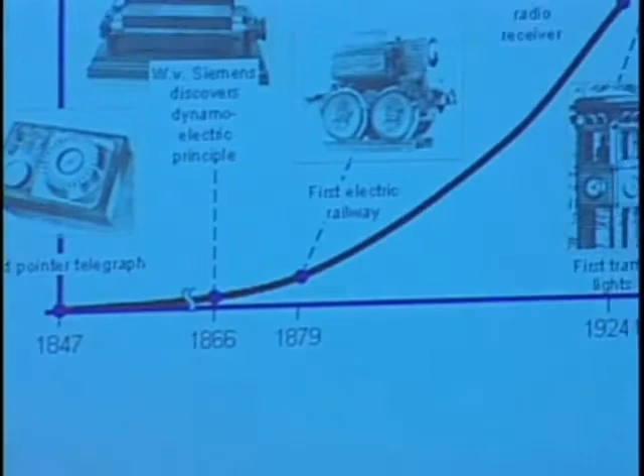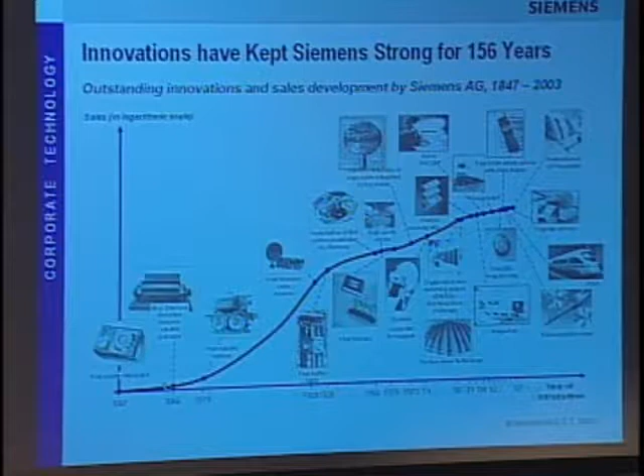Siemens has always been committed to innovation from its beginning. The company was founded 156 years ago, with its first product being the pointer telegraph. Today we would say this was a typical one of those garage companies, a typical startup. But at this time there was no venture capital available, and there were no cars and no garages. Nevertheless, the company started this product very successfully, and in the upcoming years it grew always through innovations.

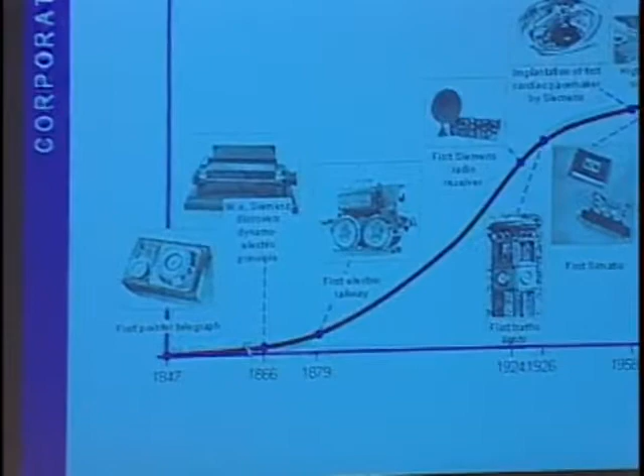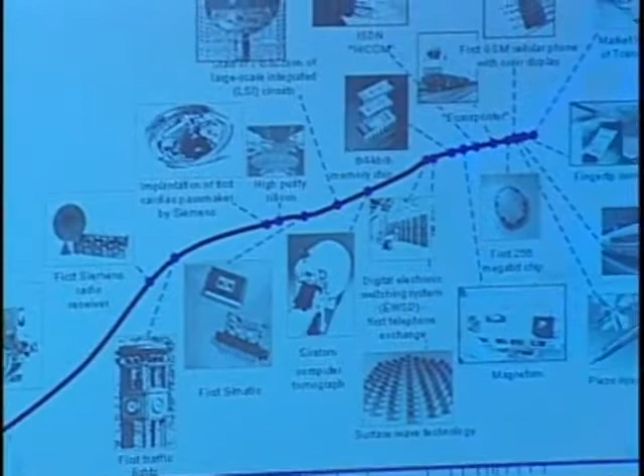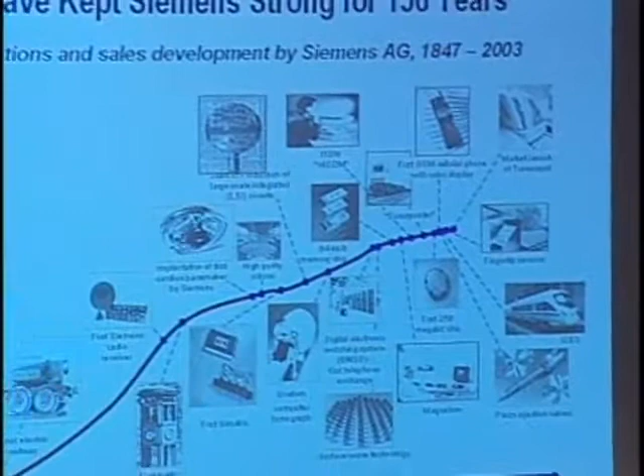Many of these innovations have become milestones in the history of electrical engineering and electronics, like the first electric railway, the first dynamo. In former times, there's also the high purity silicon developed in '53, and today still 80% of semiconductor grade silicon is produced using Siemens processes, though the patents have already expired. In recent years, just to mention the Piezo injector for diesel injection, or fingertip sensors, among other examples.

Today we are number 3 in the world of electrical engineering and electronics, following General Electric and IBM, with total sales of 74.2 billion euros in 2003. By the way, 25 years ago we were number 7. What should be mentioned in this ranking of the top 10 electrical engineering and electronics companies is that Siemens is the only European company. And there, for the first time, we have Samsung, a Korean company, getting into this top 10 list.

So what's unique with Siemens, on the one hand, is that we are mainly engaged in the field of electrical capital goods. But another special thing about Siemens is its high degree of internationality. We have presence in more than 190 countries, and it's said that only few organizations are more international than us, for instance Coca-Cola or the International Federation of Association Football. But the internationality of Siemens is a result of its long history, and it's indeed one of the big assets of our company.

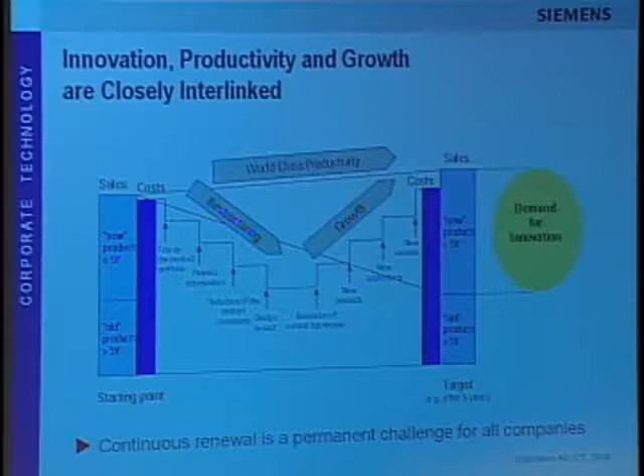The third statement I'd like to make is, and this is an empirical experience, that the deeper the V, apparently these are the innovation champions. So those companies which learn how to restructure very effectively create apparently a type of culture, a type of atmosphere which is very fertile, very useful for innovation.

Segmenting the sales position into so-called old products, which are older than 5 years, and new products, younger than 5 years. After a 5 year period, all the old products have disappeared, and the new products have become old products.

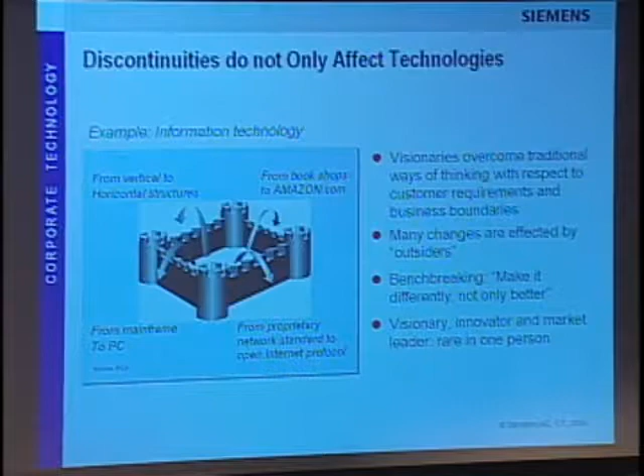The typical example is in the field of information technology, when we went from proprietary network standards to the open internet protocol, for instance, or from mainframe computers to personal computers. It resulted in a change in the industry from vertical to horizontal structure, or completely new business models like Amazon.com.

And apparently, the background of this type of change is that those visionaries overcame the traditional ways of thinking with respect to customer requirements and business boundaries. That means they left this castle of thinking and jumped outside to look at it from the outside. And apparently many of those changes were effected by outsiders.

In connection with this, there's also the word bench-breaking, on top of or in addition to benchmarking, which is no doubt a very useful tool and a must. But sometimes bench-breaking, meaning making it differently and not just better, can be the better strategy.

Another experience is that the visionary, the innovator, and the market leader being the same person is rare. This was the case with Thomas Alva Edison and maybe Werner von Siemens, but in more recent times I did not find many examples of that.

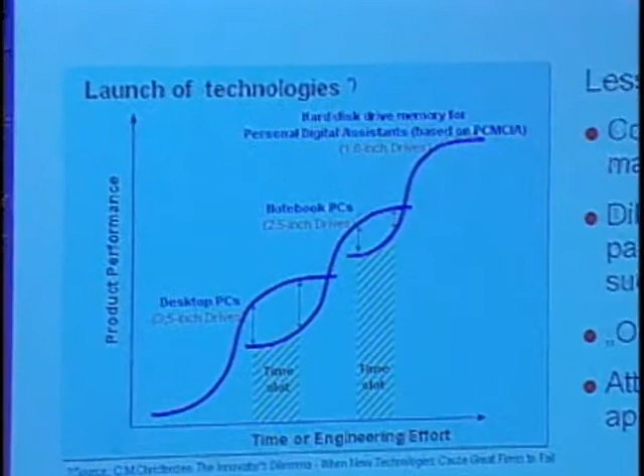In this context, there's the famous book by Christensen on the innovator's dilemma, describing the fact that the launch strategy and launch time are decisive for the success of a new technology. He described this with the hard disk drives, where one generation was substituted by the new one, differing in the diameter of the disk itself, along with many other things.

The main lessons learned were that it's maybe not most important to be the fastest on the market, but it's decisive to make the correct anticipation of the product, of the customer, and of the market requirements. That is decisive.

In connection with this process, big companies mainly face a large danger or dilemma: the cannibalization of their own successful businesses. And all we can say is, if you do not cannibalize your own business, then others will do it for you.

Another experience is that old technologies fight back, and the lesson learned is: if you have a new technology, you should attack via a new application, not start a direct attack on the established technology. There are a lot of good examples in history.

The most prominent, no doubt, is the cathode ray tube versus liquid crystal displays. Liquid crystal displays have now reached a point where they can compete with cathode ray tubes in size and performance. But they did not start a direct attack on cathode ray tubes in the 70s — instead starting with wristwatches, pocket calculators, pocket TVs, and similar things.

I'd like to say also that due to the pressure of liquid crystal technology, the producers of cathode ray tubes significantly improved their products and their performance.

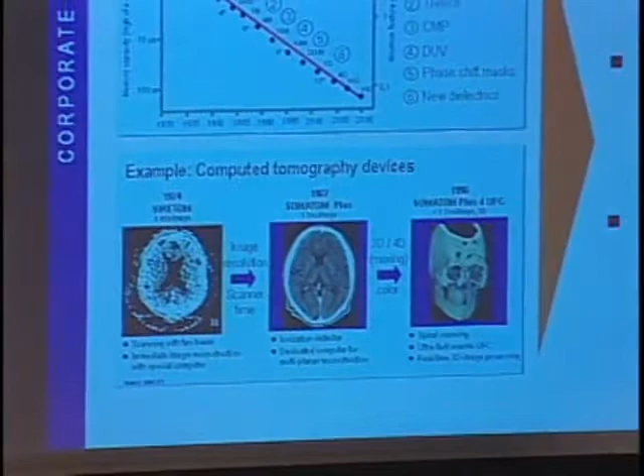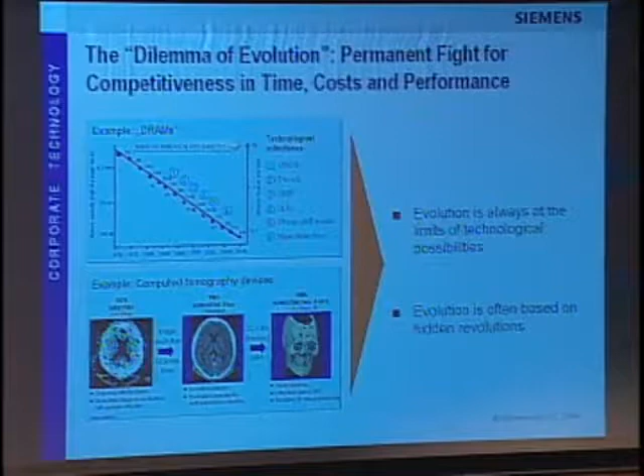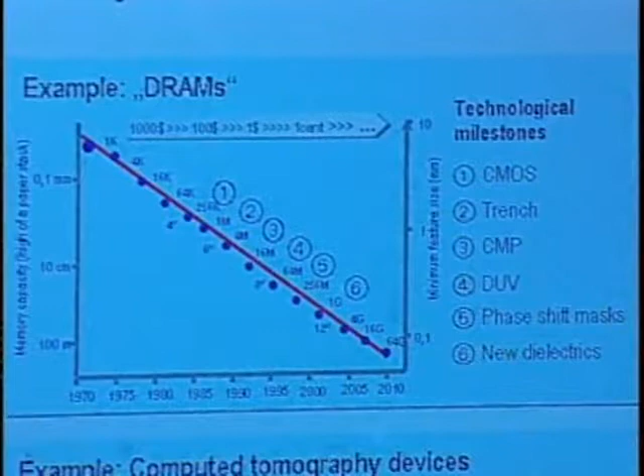Looking at two typical evolutionary developments in more detail: the first example is the DRAM, and everybody's aware of Moore's law. But looking in detail, with the 256K or the 1 megabit, at the latest, we switched over from NMOS to CMOS technology. With the 4 megabit DRAM, we had the trench technology.

With the 16 or 64 megabit, chemomechanical polishing came up. Then deep UV lithography or phase shift masks, and now, beyond the 1 gigabit, we have to look for new dielectrics.

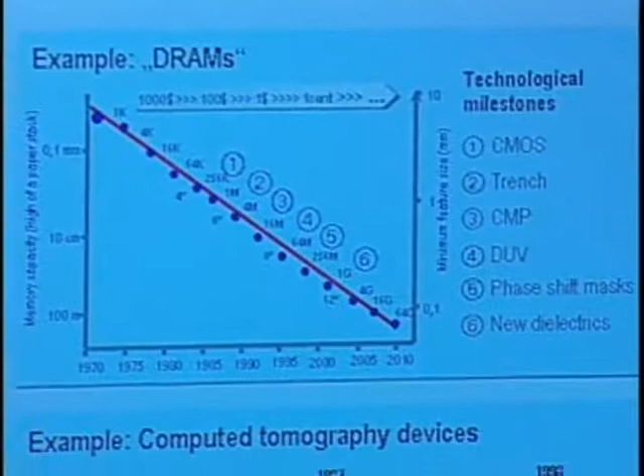The other example is computed tomography devices. This was one of the very first ones, in '74. You can see how the quality has improved through many, many improvements — based on the algorithmic side, the detector side, and many other things.

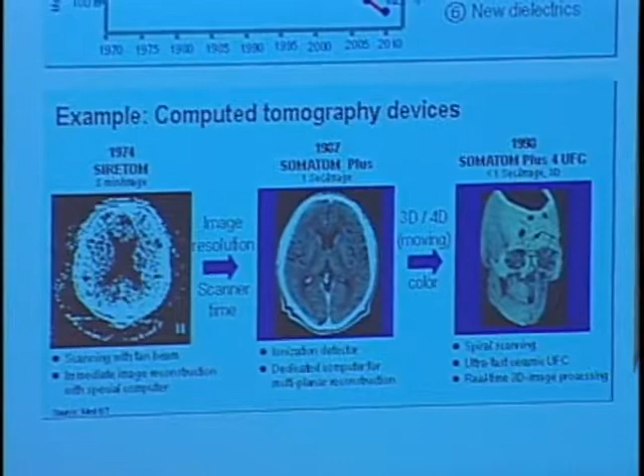So what we can learn from this is, first of all, evolution is always at the limits of technological possibilities, which makes it difficult. And the second statement is: evolution might look like evolution from the outside, but if you look deeper, you'll find a lot of hidden revolutions, because each of these steps by itself represents a revolution within that technology.

So what we can learn from this is that innovation, independent of whether it's revolutionary or evolutionary, is always difficult — it's hard work. That means finding the right strategy is maybe the most important thing. Any innovation strategy has to be part of the business strategy.

So when you have found the business strategy, this fixes the innovation strategy, and out of the innovation strategy you should develop your technology strategy, and from that, the R&D strategy — where to place the resources. It's mainly a top-down process.

However, I have to say for brand new things it can go the other way around — some new results out of R&D can finally define the business strategy.

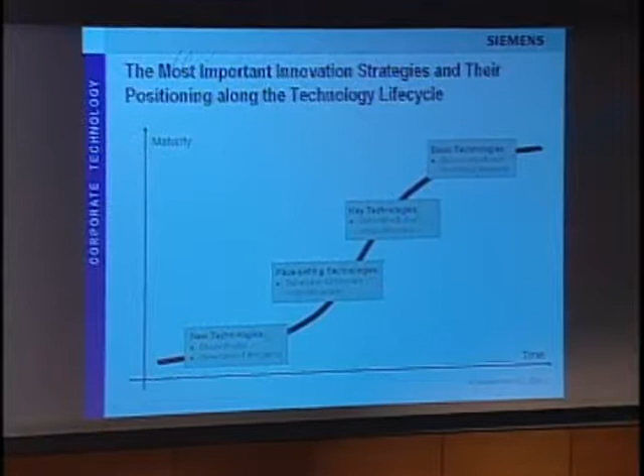Secondly, looking at the most prominent innovation strategies, I would say there are basically three, which I'd like to position along the typical S-curve of technology, which shows the maturity of the technology over time. Everything starts with a new technology, which might represent a discontinuity, setting up new rules of the game.

Then when the slope starts to increase, we are talking about pace-setting technologies, because they determine tomorrow's competitiveness. Key technologies determine today's competitiveness. And when things get saturated, we are talking about basic technologies, which represent the basic competence of today's business. This, by the way, is the segmentation we at Siemens use to classify our technologies according to the attribution of the business.

And the three main innovation strategies are: the first is the first mover, who concentrates on these new technologies, on these pace-setting technologies.

He has insight into the key technologies. You know the American saying: the early bird gets the worm. In Germany, we have another saying: the early potatoes get the highest prices. This is the first mover strategy.

The second strategy is the fast follower, which concentrates mainly on key and basic technologies. He has some knowledge of pace-setting technologies, but his philosophy is to win the race not by leadership in technology, but by putting his core competencies on other fields, like logistics. As Garrison Keillor said, the early bird might get the worm, but the second mouse gets the cheese.

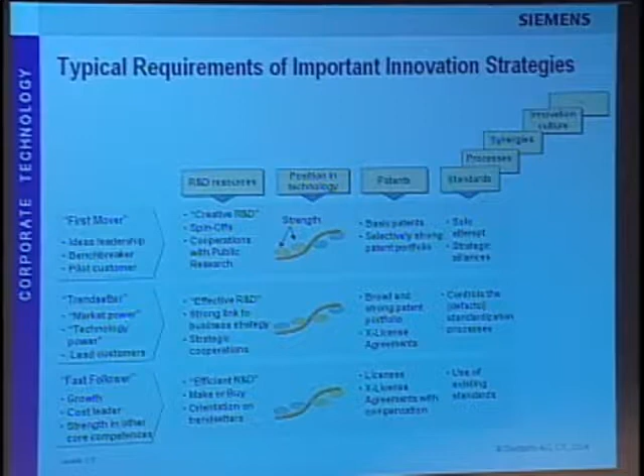The trendsetter has market power and technology power, so he strongly links R&D, technology, and innovation strategy to the business strategy. He has a strong patent portfolio, is strong enough to enter cross-license agreements, and controls at least the de facto standardization process.

The first mover has the basic patents. He tries to make a solo attempt or to form strategic alliances, and focuses more on new things, on creative R&D.

The fast follower looks more at efficiency and make-or-buy decisions. He orients himself on the cost trendsetters and focuses on cost leadership. He may be profitable enough to enter cross-license agreements with compensation, and relies on existing standards.

Despite this being a schematic, crude picture, the main message is that if you develop an innovation strategy, it has to be consistent in all these aspects. The consistency of the innovation strategy is the most important thing.

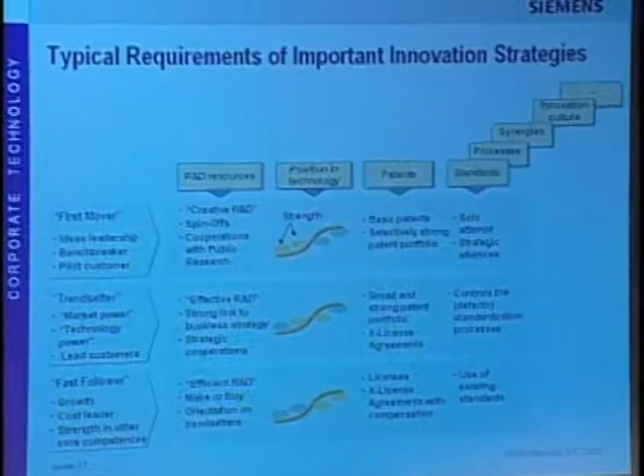From this, you can figure out what we decided our innovation strategy to be: that of a trendsetter in our businesses. Having a broad scope of businesses, as I've described before, it's hard to find all the things which are in common.

Nevertheless, I tried, and I'd like to focus on 7 points important for following the trendsetter strategy. First, you need comprehensive visions on where your businesses are going. Second, you cannot be present in all technologies, but you should be in a leadership position at least in those which are strategically important.

Technological strength doesn't help much if it's not protected via intellectual properties, so you need a strong patent portfolio. The fourth element is the optimum use of synergy, especially for a company with a broad scope of businesses like ours. The fifth is optimizing all processes involved in innovation, R&D presence in the lead markets, and finally, the excellence of the people.

I'd like to go through these 7 elements, and let me start with the visions.

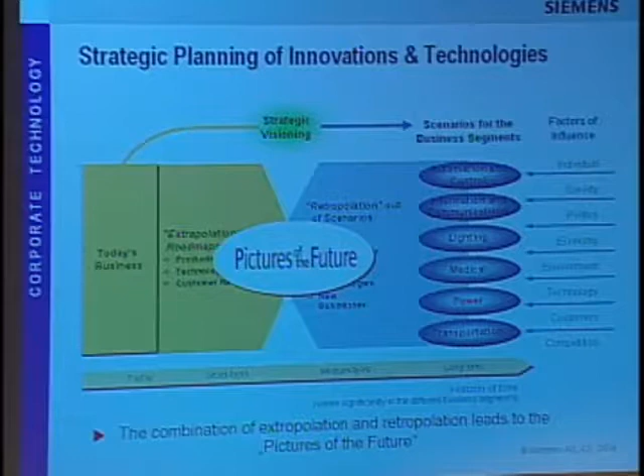And then, and this is maybe what we are doing as the only one in our industry, we try to match these two views - matching the extrapolation and the retropolation - finding the ways from today's to tomorrow, or the ways from tomorrow to today, where those ways match each other. We describe the synthesis of this process as the pictures of the future of our business segments, which represent, as shown here on the bottom line, a combination of extrapolation and retropolation.

Indeed, the result of this process is a very comprehensive, detailed and huge data and information basis describing all important aspects like socio-economic trends of society, life of work, the main market trends in terms of size, growth, the structure of the market, the geographical distribution, the customer business trends, how the value chains or value networks develop, the company structures and other processes.

And then, of course, we are looking at technological trends, their strategic importance, the multiple impact technologies and those which are disruptive. What you can see here is simply the cover pages of those pictures of the future for information, communication, transportation, medical, lighting, automation, control and power. What can be seen easily is that everything is networked, meaning information technologies play a decisive role in all these businesses.

When I ask myself, can I summarize what comes out of this? This, of course, is something hard to do, but nevertheless, I try to do it, and I'm sure it will not bring you anything brand new. But nevertheless, I'd like to state there's a certain philosophy behind it.

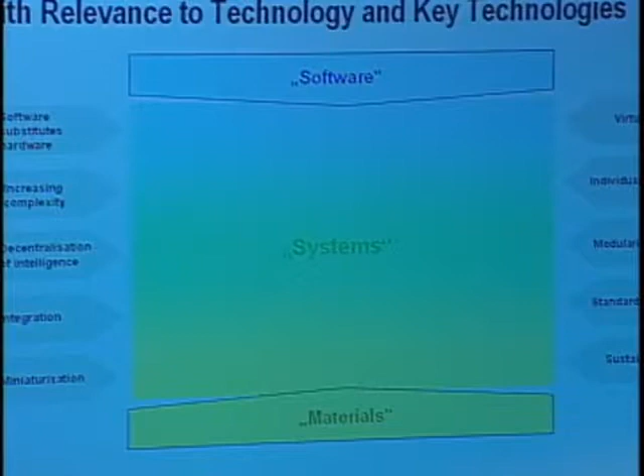And the main technological trends in building up those systems are: first of all, that software substitutes more and more hardware. We have increasing complexity. To afford the complexity, we decentralize intelligence - that is the normal way. Integration and miniaturization play an important role, as do virtualization, individualization, modularization, standardization, and sustainability. These are the ten elements which influence the building up of those systems.

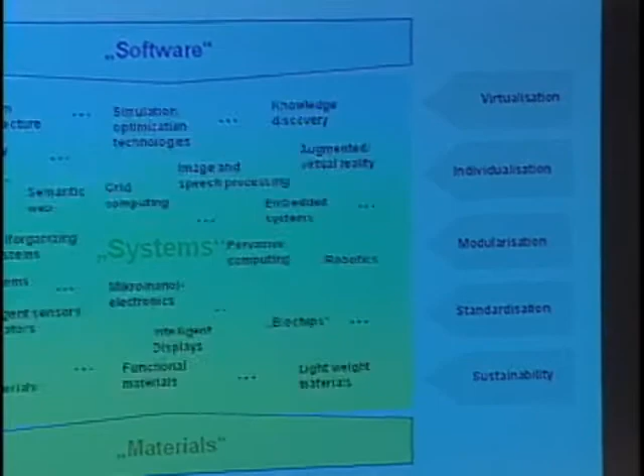And within this scope, you can find a lot of technologies - you could list maybe hundreds of technologies, or maybe 10 or 20, whatever you want. So I give just a few examples: from system architecture, knowledge discovery, simulation, image and speech processing, grid computing, neuro or bioinformatics, and out of the materials, nanomaterials, functional materials, lightweight materials, intelligent displays, nanoelectronics, pervasive computing, and so on.

And each of these technologies does not stand by itself, but contributes to building up new and innovative systems. The core competence in the future, and this is my main message, will be rather interdisciplinary research between these technologies. And of course, in this connection, knowledge management will play a decisive role in the company.

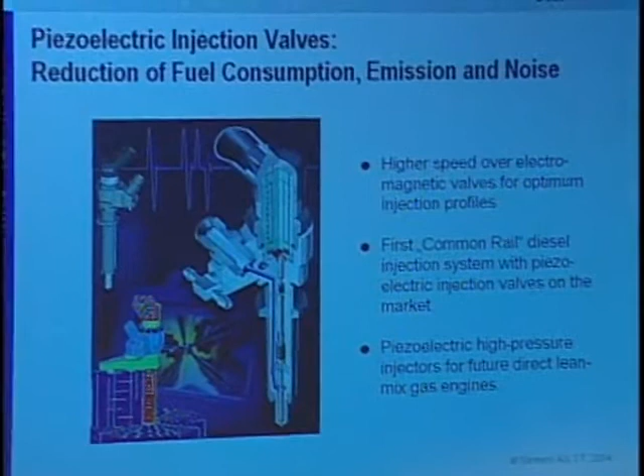Two examples of this interdisciplinary research. This is a piezoelectric injection valve, which we put on the market first. We were, in the 80s, a newcomer in the market of automotive electronics. We did not have experience in diesel. But when the common rail technology came up, we tried, of course, to become a leader with a new technology.

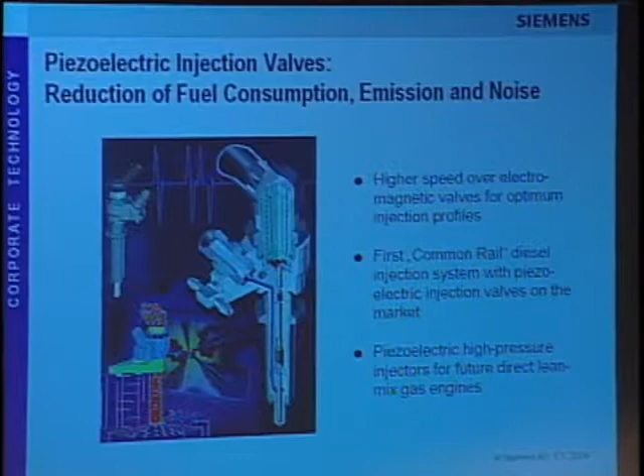And the idea of the new technology is that we replaced the electromagnetic valve, which is part of the commonly used injection valves, with a piezoelectric actuator, which is much faster than the electromagnetic valve. This allows us to inject the diesel fuel in small doses to run a profile which at the end results in less fuel consumption, less emission, and less noise.

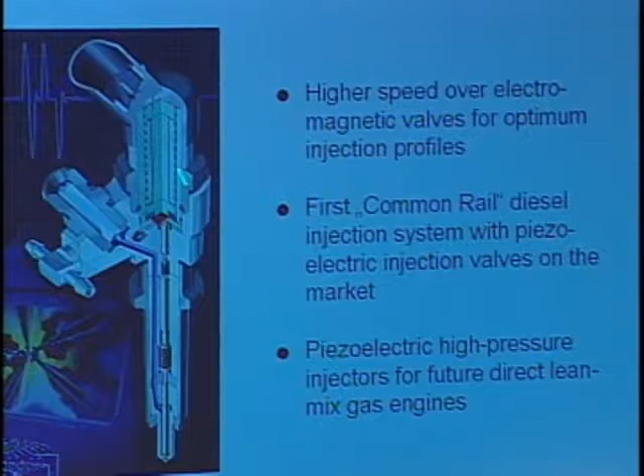And we put this system on the market. Up to now we have already produced 5 million of these valves. It's also the technology of choice for the future direct lean gas engines. And it's a typical example of interdisciplinary research, because it was not only the actuator, but the whole system design, the simulation, mechatronics - all of this was included to realize this.

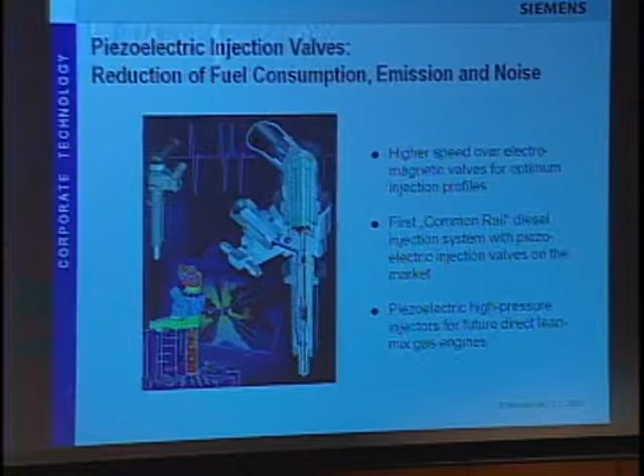And the second example is out of the medical solutions group, where we made a 16 detector array. By the way, at the last RSNA we already presented the 64 detector one, but this was one we presented two years ago - a computer tomograph which has superior performance in terms of the detector array, but also in terms of the image processing.

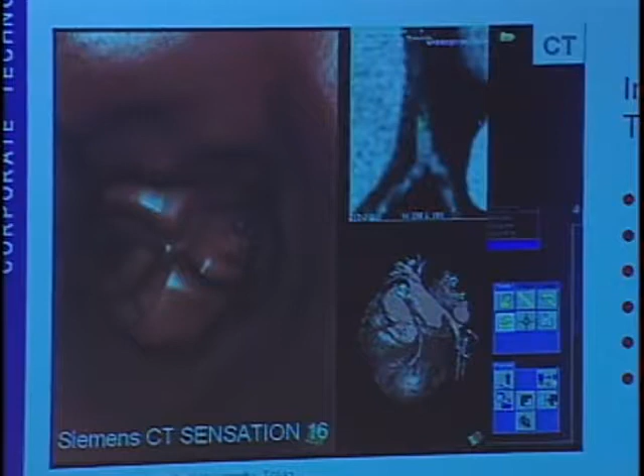Which contains segmentation, modeling, classification, dynamic analysis, and visualization.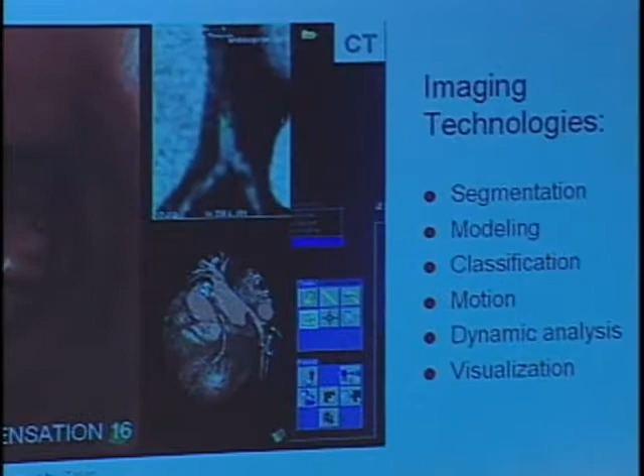Here's a picture of a heart to look at on a 3-dimensional basis. But what we can also do is form a so-called virtual endoscope and fly through the coronary arteries, looking from the inside what's happening there without any mechanical introduction of an endoscope.

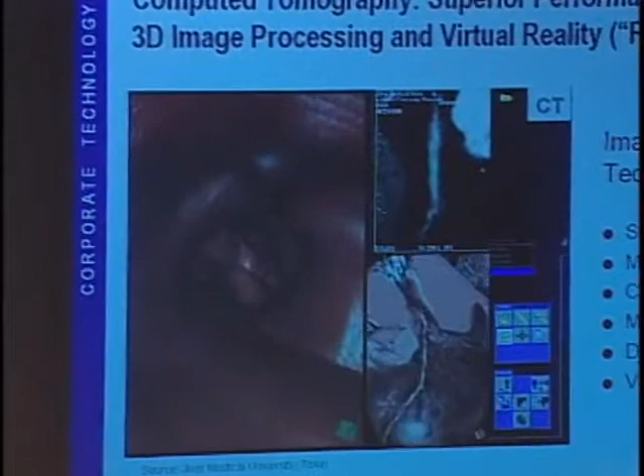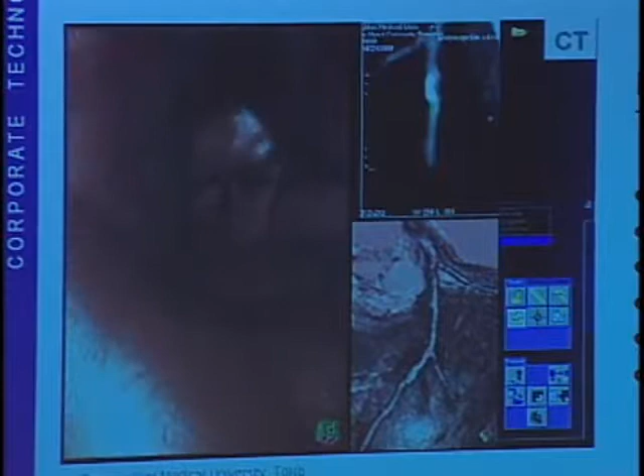Starting this, you can see how the heart can be shown, and how the green point is propagating through the arteries. After a few seconds, you'll see that in this artery there's apparently something which should not be there—these are calcifications, as can be seen here, and this can all be pulled out through very highly sophisticated data image processing. I feel this is a good example of this type of interdisciplinary R&D.

Next point are the patents, which have become more and more a strategic weapon. In the 80s, when globalization had not yet taken place in most parts of our industry, we had an inventor-oriented strategy for our patents.

In the 90s, we became business-oriented, managing the IP process better, making use of licensing, also of non-core IP. But now we have EVA-oriented patent processes, which take patents as a corporate asset for the whole company, where you try to create intellectual properties on demand and make licensing a business. Doing this step by step increased the value of the patents.

We started in 1995 with a so-called innovation initiative, which also gave publicity to the inventors of the year. When we started this initiative in 1995, you can see that Siemens' patent publications increased over the years, more than doubling within the six years shown here. You can see that our competitors, to some extent, also tried to set up similar patent initiatives.

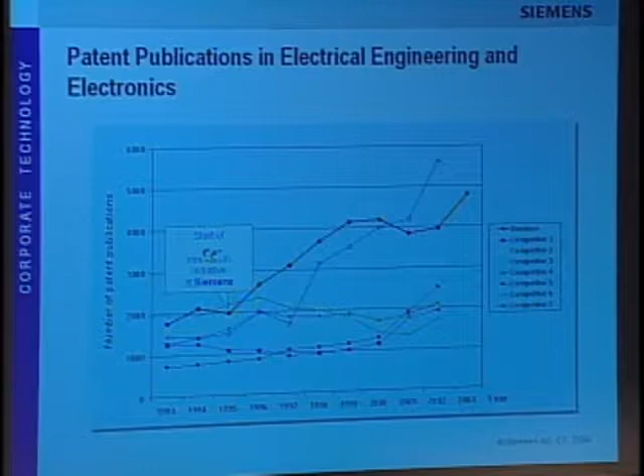I'd like to say that the number of patent publications is not the whole story—the quality of the patents is what's important.

A few words about synergy. Making use of synergy could lower cost, increase speed, and reduce risk. But if I say 'could,' I'd like to say synergy is not a free lunch. Synergies can be created in different aspects—one, as I said, is patents when taken as a corporate asset, common platforms, joint developments, multiple impact technologies, best practice sharing, or the management of knowledge, skills, and people. But you really have to balance synergy in a way that you get the optimum out of it.

Having a common platform, a joint development, or joint competence innovations might mean you have to make some compromises, and this is something you have to carefully balance.

One of the most effective ways of creating synergy in our company was, no doubt, best practice sharing in the field of software. We started in 1995 a company-wide software initiative, split into 20 group-specific software initiatives. The motivation was that more than 60% of our sales heavily depends on software, so excellence in software is a must for us.

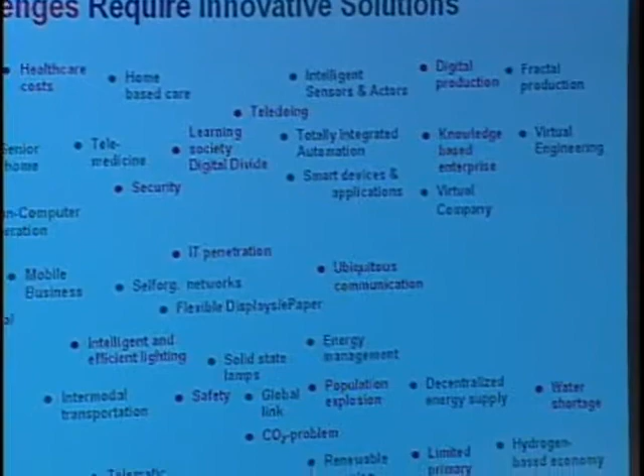I ask myself what these solutions have in common. First, I'm convinced they all require interdisciplinary work between technologies and between different businesses to join competences. Secondly, many of them will not be realized according to technological feasibility or possibilities, but rather what will be economically affordable.

So we have to carefully watch what from this side can be realized and what not. Third, the realization of many of these solutions will require a strong consensus between industry, science, politics and society. And last, electrical engineering and electronics will play decisive roles.

Now you will understand why I depicted those examples in that way, because this exactly covers our business segments where Siemens is active. The last slide I'd like to show is a statement from our CEO, Dr. von Pierer, who said the best way to predict the future is to invent it and to shape it yourself. That's maybe in a nutshell what we understand under the word trend setting. Thank you for your kind attention.